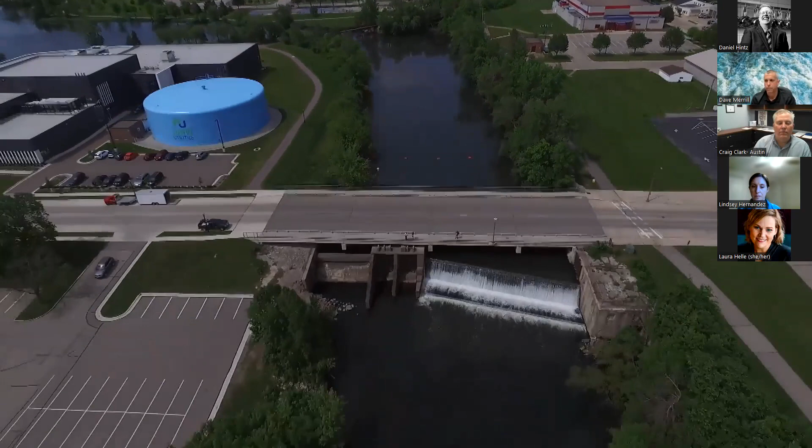So Dave, what area of town is this, just so we can have some reference? This is just east of our downtown, a couple blocks east of what our downtown area is.

And where is this footage from that you're using to create these models? The footage we're seeing is a mashup of two local water parks, one in Manchester, Iowa, and one in Charles City. They've given us permission and become allies and friends of ours on this project, helping us along the way by letting us use their images, their expertise, their experience.

So because of that, you can really show the comps of how a project like this has impacted other communities, correct?

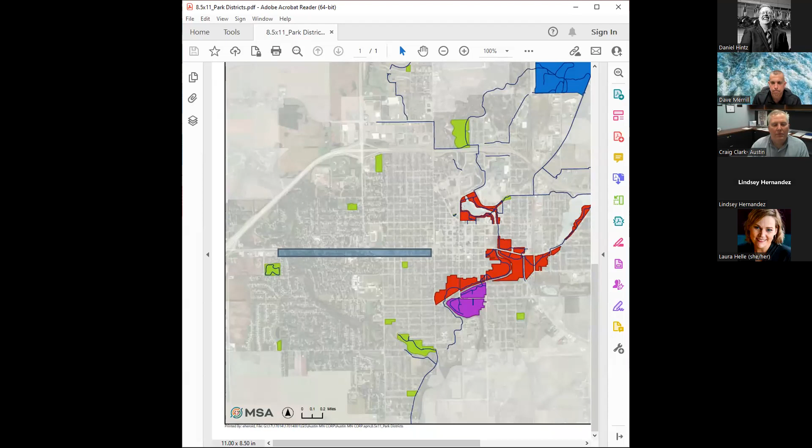Okay, so the map that we're looking at here is a product of our Parks and Trails master plan proposal. The red map that we see here is the river district that we've identified, and these are all parks that are currently connected to the river in downtown Austin. If you'll see here on the screen in the center, there's a gap, and that gap is conveniently the place where our whitewater course would be.

The idea is that we would connect facilities and amenities in our Mill Pond area, Horace Austin Park, to some of these southern central parks through greenways that we would connect through with our whitewater project. And I have another map of that.

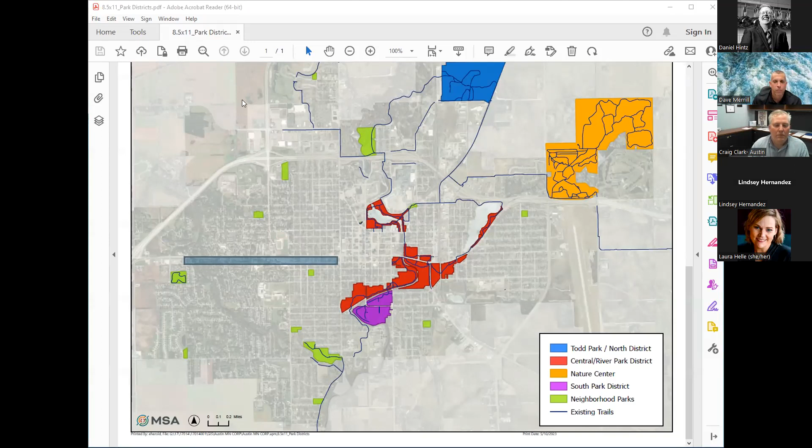So Dave, if we're having a hard time with that map, will this map be uploaded in the near future on either the city website or the parks website so we can send people to take a look?

Yes, once we have a little bit more detail. We have a meeting with our consultant REP, the company doing our feasibility study, coming up next week. That'll provide more detailed information that we'll be able to start presenting to the public. We're going to be on their pace in terms of what they really think we should be releasing at certain times.

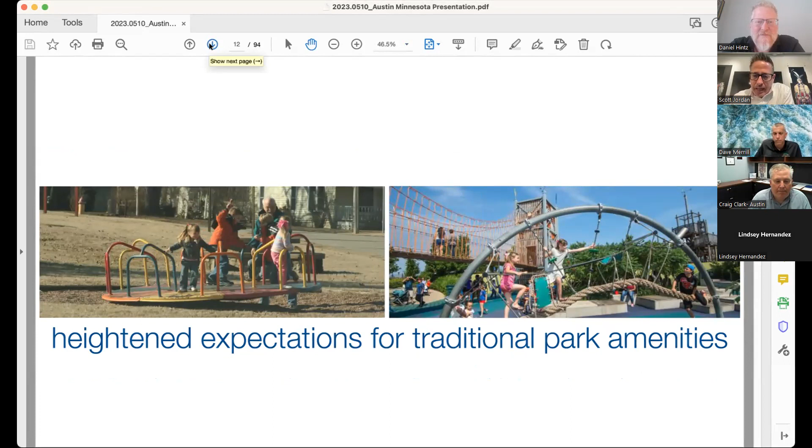The spinorama playgrounds we used to have are no longer legal, but we're creating amazing interactive play spaces that allow kids to adventure and think out their own way. We're seeing a bigger increased value on natural systems, creating places that are both for people and nature. Ultimately, parks and open spaces are about an inclusive approach to placemaking, giving everybody in the community a place where they can feel comfortable, welcome, and a place to hang out.

So I'm going to share with you 3 projects at 3 very different scales. The first one is in Wayzata, just north of you all. This is a project we've been working on since 2015.

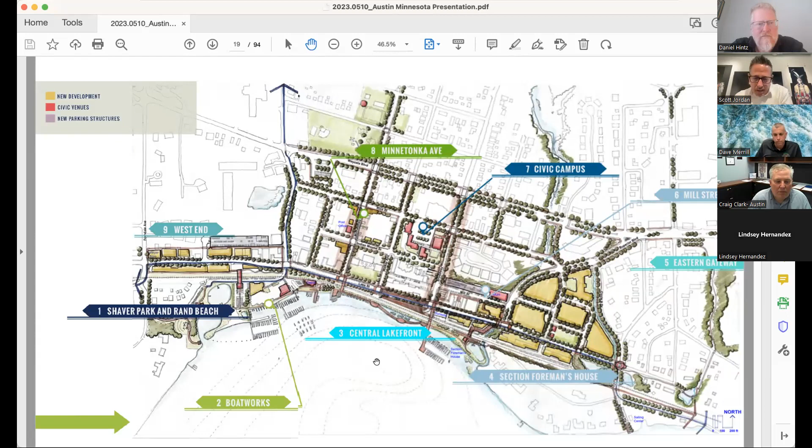This was a process that we built upon a larger community planning effort done ahead of us, called the Wayzata Lake Effect. That was a full community plan, and we were really just looking at the central waterfront area. This is where what Dave and the Parks and Trails Master Plan is doing now comes in.

We create a vision for some of those spaces to catalyze excitement and opportunity for the community. We began this process in 2015. Phase 1 was completed in 2020, and we're about to begin phase 2 construction on July 1st. We've had 5 community meetings, 9 steering committee meetings, 8 council work sessions, and 11 council presentations over that time.

So we shifted partway through and started doing what we called ice cream socials. This was for phase 2 down on the built waterfront that we completed in 2020. We still got the elder white family members coming out, but we also had teenagers and kids. We really brought a diversity of users to talk about what they wanted on their lakefront.

Ultimately, we created a series of guiding principles, or core values: making it about the lake, making it environmentally sensitive for local residents, and ultimately making it safe, since you have a railroad you have to cross to get to the lakefront.

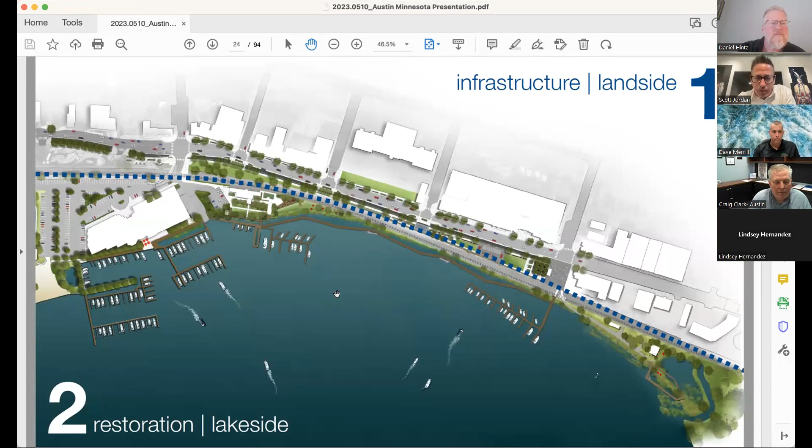So we developed a two-phase plan. Phase 1 would be everything north of the tracks in downtown. Phase 2 would be south of the tracks, the lakefront improvements. There are two different phases with potential subphases, and seven different sources of funding. Phase 1 was 9 million, phase 2 is about 10 million, and I'll go into those phases further.

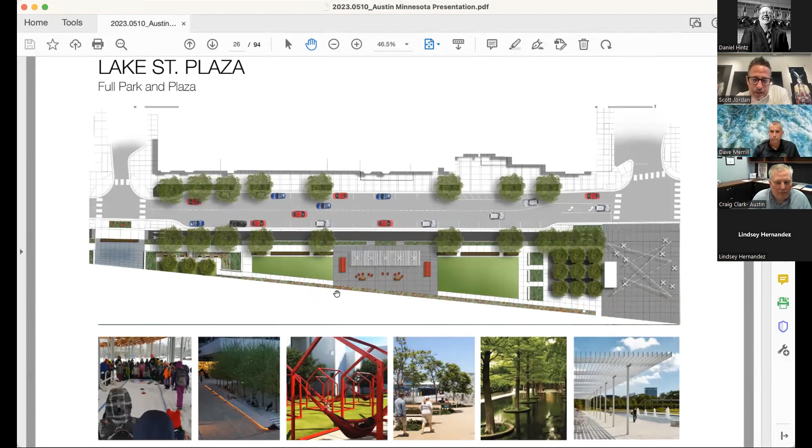The first phase looked at Lake Street and the municipal parking lot on their prime corner. If you asked community members whether, in designing a city, they'd put a parking lot on their lakefront open space, probably not. So this project was about reallocating Lake Street and creating a better pedestrian environment to spur reinvestment in retail, create a place for the community to enjoy the lakefront, and ultimately balance pedestrian versus vehicular traffic.

We asked the community, what makes great main streets? It's a balance between pedestrians and cars. It has vibrant retail that spills onto the street. There are amenities that entice users to linger. As a main street, you want people to hang out and exist there, and ultimately a main street can become a place upon itself.

This is a street we did here in Denver that has since converted through the pandemic to a closed-off street. So this is what it looks like most days now, which is quite wonderful.

As we looked at Lake Street in downtown Wayzata, this is what it existed as today: two parking lanes, two drive lanes, a center turn lane that's never used, about 10 feet of sidewalk on this side, and about 5 feet of sidewalk on the lake side to the south.

This is what we're proposing to do: putting the road on a diet, narrowing it to single drive lanes in each direction, getting rid of the center turn lane, and adding about 20 feet of outdoor space along the retail so restaurants can spill out into it. Along the south side, we're shifting it over, adding more sidewalk, and creating an interconnected regional bikeway right into downtown.

This bikeway connects out to the Dakota Rail Trail system, which runs about 26 miles around Minnetonka right into downtown Wayzata. It's really about bringing people down and realizing the economics of commerce they could attain.

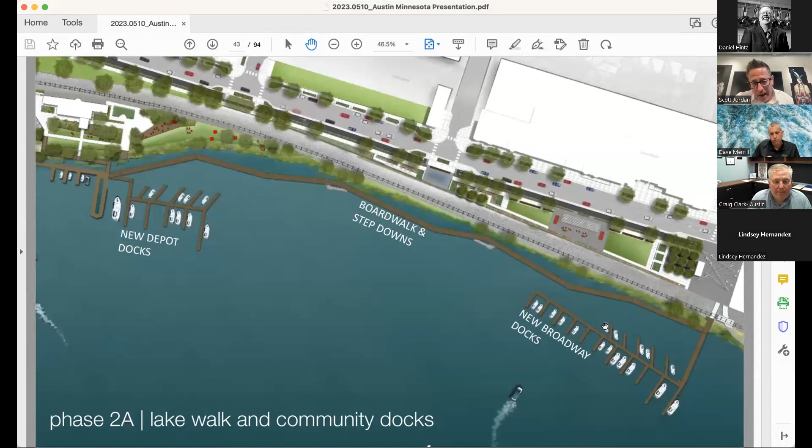So then moving into phase 2, this was where we were actually reconnecting the lake, building a boardwalk that's about 1,500 linear feet long, so people can walk along the water's edge on the waterfront, and building the docks. This is about a $10 million investment.

Again, they diversified their funding. They got $500,000 from the watershed district for some stormwater and lake bed restoration work. They received bond money from the state, and they also had some TIF money available from some redevelopment projects that they were able to shift to use on public open space.

And then they formed a conservancy that's responsible for raising about 1.5 million of those funds, and the way they're doing that is through some naming rights. An interesting story about that is the property owner who owns the building on the north side of Lake Street

fought against the project during early design and has since realized the benefit it's created for downtown. They're actually the leading donor, donating about $500,000 towards the Conservancy funding to build the boardwalk because they just see the value of what it is. So we took a concerned neighbor and turned them into a project supporter.

So the lake walk itself is an extensive 10-foot wide boardwalk with some step-downs where you can get down, touch the water, and then some community docks.

This is beginning July 1st, when they start driving piles, and we will be open by the end of the year. So for the first time in 80 years, they'll actually be able to walk along the water's edge in downtown Wayzata.

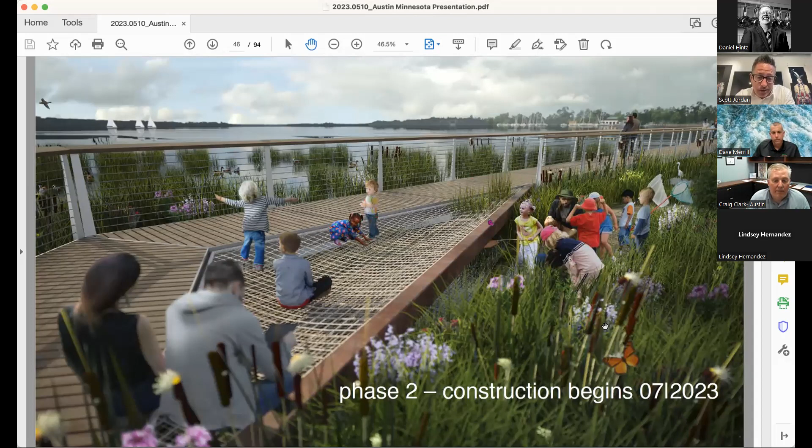The next project I'm going to talk about is a little bigger scale. This is in Denver, Colorado, on the South Platte River. If you don't know Denver, the South Platte, at the confluence of the South Platte and Cherry Creek, is where Denver was formed, right here.

But even in the 50s and 60s, it became an industrial area. Like every city in North America, we kind of turned our backs to the river. This is what it looked like in the early 2000s, where it was literally a wasted industrial area with a very constrained river flowing through the site.

This is what the site looked like previously, and what it looks like today. What I'm really going to talk about is how a park can become part of a bigger open space system to really catalyze reinvestment, to create new communities, and to create a shared, attainable, and market rate community where previously nothing existed.

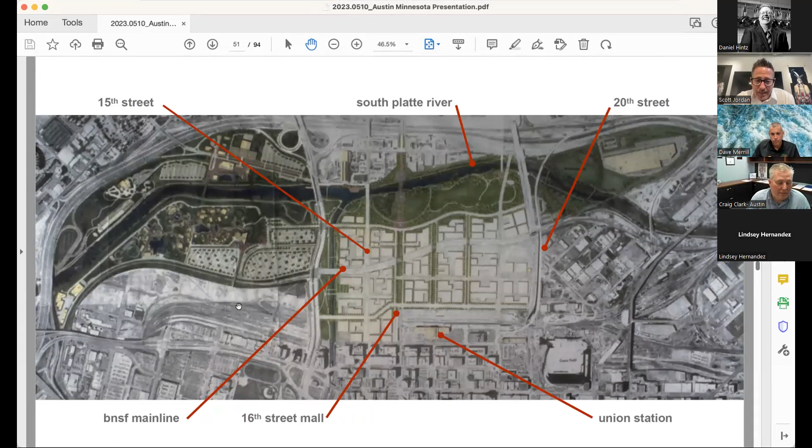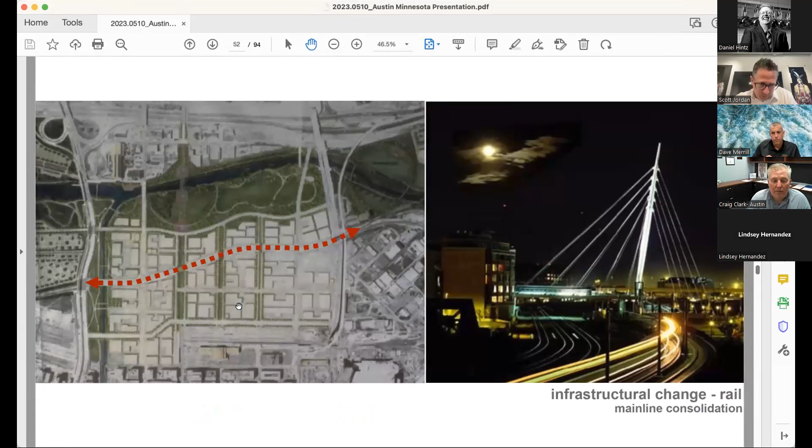Some of the key moves, and how this folds into a larger comprehensive plan, were that we looked at consolidating the rail line that cut through downtown Denver to narrow it down and make it easier to connect. A couple of major improvements were new roadways: Little Raven Street, the street that edges the park, and then 20th Street and 15th Street, which were actually viaducts.

They were raised about 20 feet above street level going over the Platte River. We knocked those down and connected them at grade, so the entire system was all connected.

To give you an idea of how bad the Platte River was, when they knocked those viaducts down, they just knocked them into the river and then removed the construction rubble out of the river.

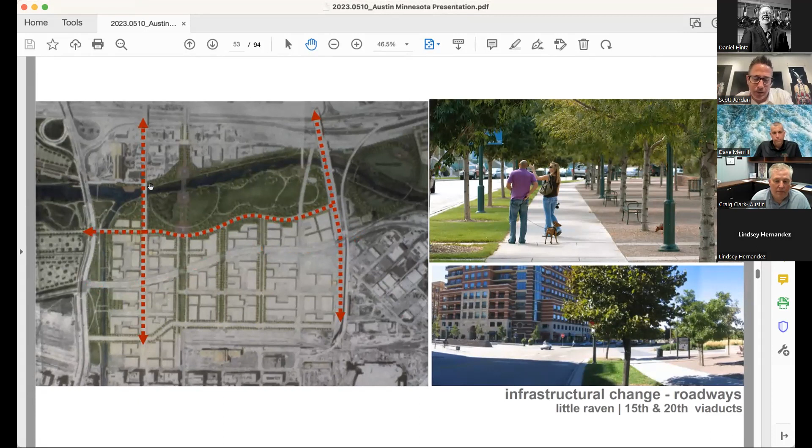In today's environment, you'd never be able to do that, but it just kind of shows you how bad and degraded the river system was.

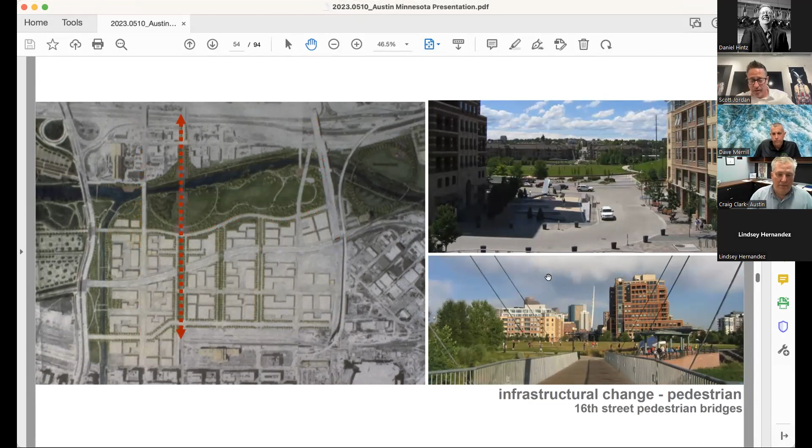A second or third major infrastructure component was a series of bridges: one across Interstate 25 to connect to the adjacent neighborhood, LoHi, a bridge across the Platte River, and then a bridge across the consolidated main line. So you're basically connecting downtown to the western half of Denver through a series of open space connections. Then we looked at how we could take a negative asset, the South Platte River, create a 100-foot native buffer around it, and restore its natural flows.

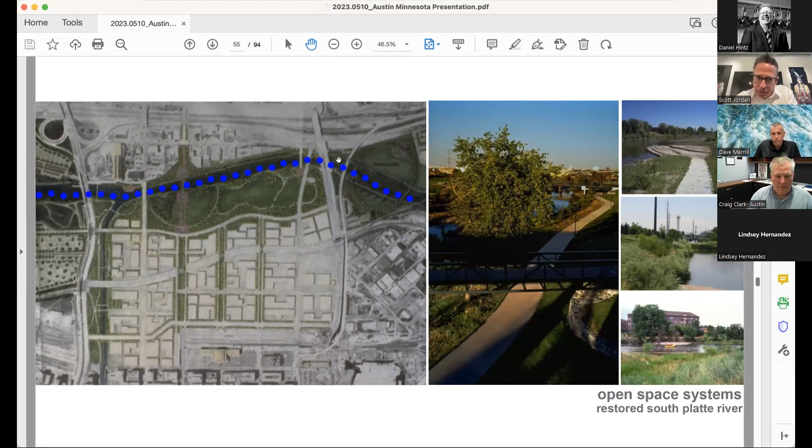Just downstream from here, in this park, we introduced a kayaking course as part of this bigger restoration system. We also looked at the park and asked, can the park actually become a relief valve during floods and high water?

What you're seeing here is an area we call the seeps, that during big rain events pulls water into the park, holds it, allows the first flush of water to get through the river system, and then drains the water back into the river. It's really improving water quality downstream while creating an interesting, highly dynamic ecological area.

You can see how it looks during high water, versus what it looks like as a nature area at the center of the park when it's dry. This area has become one of the most popular areas of the park because of all the cottonwood trees that have taken over. You get nature right in the heart of downtown, mitigating flooding issues while also creating usable public space. The open space system creates the catalyst for some of the reinvestment you're seeing.

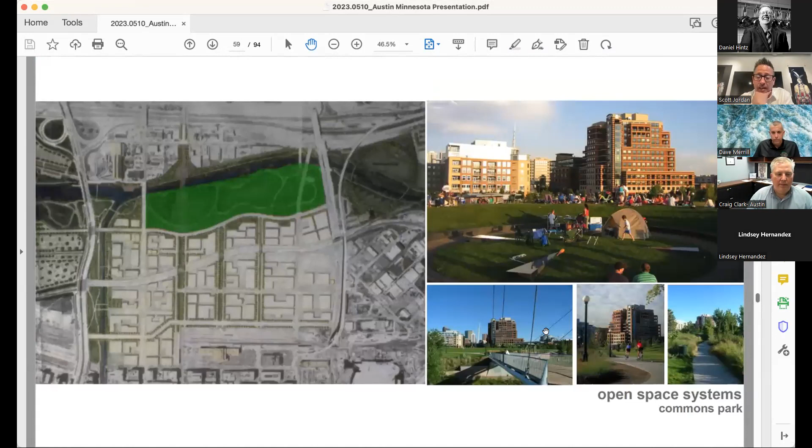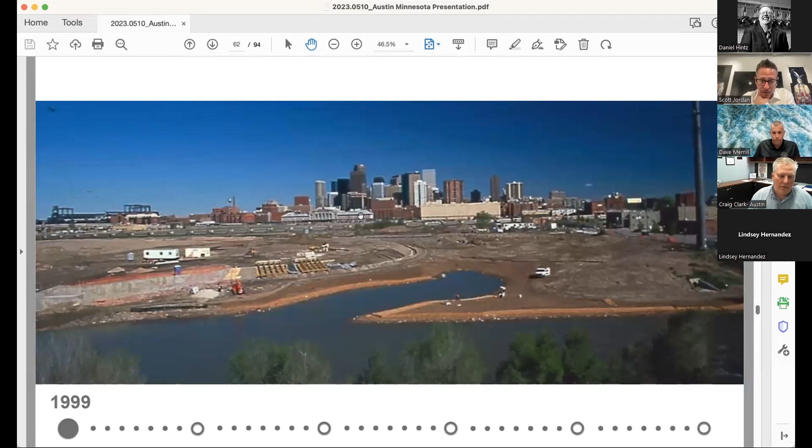This is what it looked like in 1999 when we began. You can see, this is Union Station, our train station. There was nothing between it and the river.

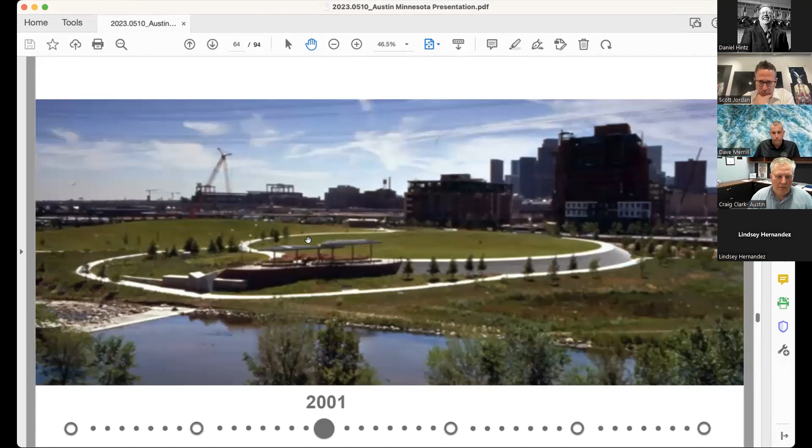As the project was getting underway, you can see some of the towers going in for the elevator systems, the first two buildings that got developed, continuing to develop and evolve. The reason I stopped at 2015 is that this development is fascinating because it spurred reinvestment along the river's edge.

But there was still this gap between downtown and the waterfront. What's fascinating is that most development patterns don't leave the edge of a city, go somewhere else, and work their way back. Because of this open space system, it became the catalyst for this reinvestment.

Since then, this area has all been infilled with office and residential, and we've connected back to the city more holistically.

In terms of metrics, the biggest thing I want to emphasize is that we took an area completely devoid of users and residents and created 6,600 new residents, of which 20% were attainable housing.

Attainable either rental or for-sale condo units. We've been able to create this diverse mix of income levels on a waterfront: 20 new retail shops, about 250,000 square feet of office, 60 acres of new parks, and 3 miles of restored South Platte River.

This really completely changed Denver in the time that I've lived here, and gave us a whole new place and a whole new system to work within.

The last project I wanted to talk about is a little bit unique. This is in downtown Springdale, where Daniel and I got to know each other.

It's a building called the Jones Center, a former trucking facility converted into basically a recreational and learning center full of nonprofits, intended for low income, mostly Marshallese and Latinx community members who live in the region. It was dedicated by Harvey and Bernice Jones, who founded the trucking company, became wealthy, sold the company, and converted this into a community center.

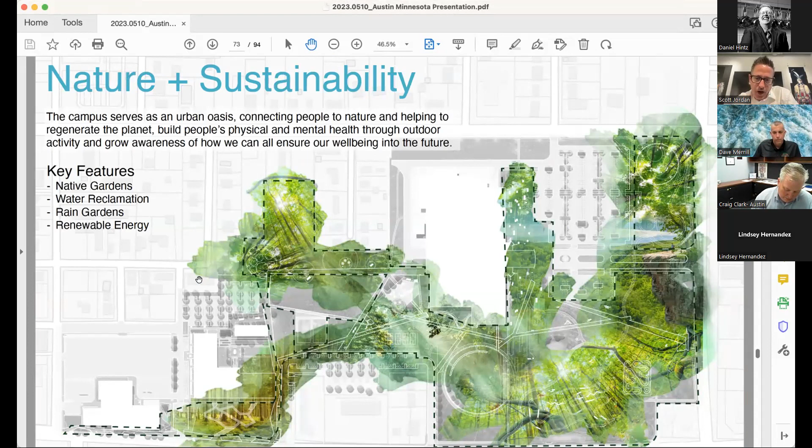The core values of this project really are about nature and sustainability. We're taking over 50% of the campus and converting it back to native, non-irrigated plant materials that will be a learning center for the community, while also positively impacting their carbon footprint and the resources they're using.

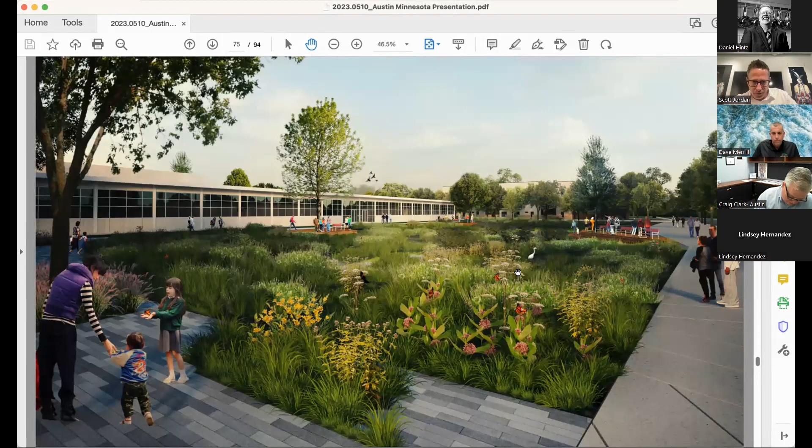A great example of that is this area just in front of the JTL shops. This is full of 27 nonprofit agencies doing really amazing work with the lower income communities in the region. They front on a big piece of lawn, and we're looking at converting that into a working rain garden that'll capture all of the stormwater that falls on site, treat it, and make this a lush educational environment. So as you arrive at the campus, you're really experiencing nature from point one, from your first entry point, and it becomes part of the ethos of the campus.

We're also looking at ways to create exploration, innovation, and creativity, through play, recreation, art, and integration of learning opportunities. How can all of these spaces be multi-benefit and provide a variety of different experiences?

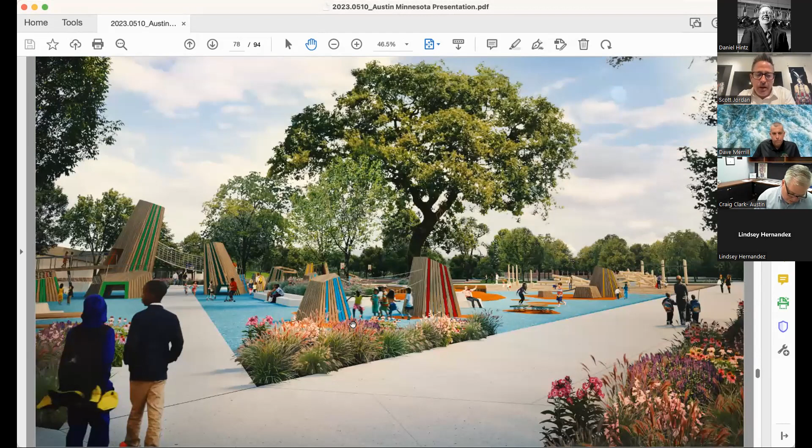This is the existing playground on campus today. When it was put in about 20 years ago, it was quite revolutionary in that it was an ADA compliant playground. We're now looking at replacing that with a universally designed playground that works not only for people in wheelchairs, but also deals with mobility issues, sensory issues, autism, and a different spectrum of capabilities, by creating a variety of spaces that enable everybody to find a place to play, engage, and enjoy. Even up to teenage girls, a group we discovered doesn't feel represented, so we're creating some somewhat protected hammock areas so they feel safe but still part of it, for when they don't really want to play on the playground.

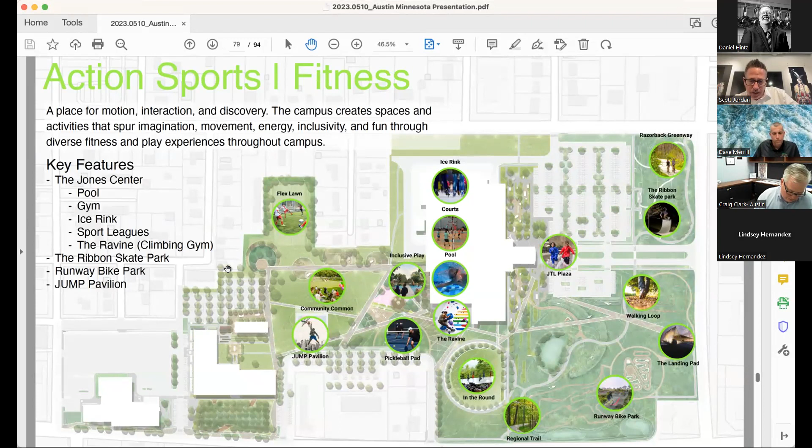And then ultimately getting it back to the bigger goal of the Jones Center as a recreational facility, creating a place for action sports and fitness. And how can we bring that ethos of recreating and being healthy from inside out onto the campus?

They've got a really amazing bike course, but right now it's all turf. We're looking at, can we restore that landscape and create an environment where you're biking and skating and doing action sports through native landscapes.

What most open spaces tend to do is create this opportunity for social gathering and entertainment and cultural gatherings. And what we've learned working in a lot of these communities, especially with the Latinx and Marshallese and most non-North American originating community members, they use parks way better than we do. They like to go gather, hang out for the day, and spend time in it.

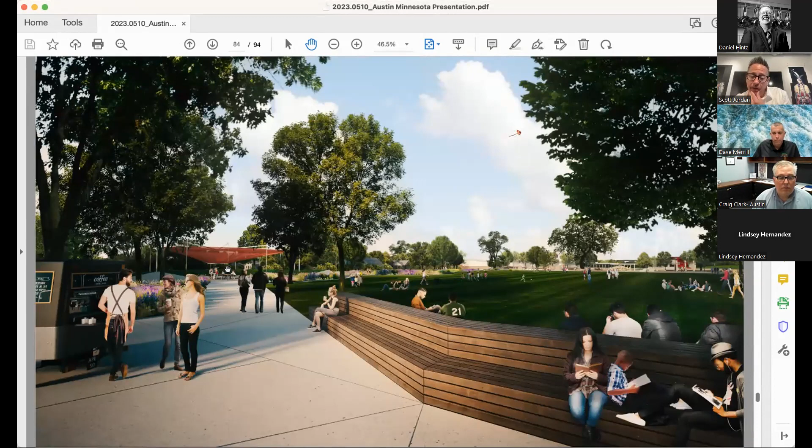So how could we create this campus as a place where you can come gather and hang out, and take what currently is a major parking lot - this is where they used to park the trucks, that's why it's a big asphalt area in the heart of the campus - and convert this into the big community lawn where they can gather and recreate and come together as a community and realize those commonalities.

So ultimately, we're creating this really diverse set of offerings across this 52-acre campus that we think is going to create a unique open space experience at the east end of downtown that's really going to become an anchor for the entire region. And I think these are the types of opportunities that you can begin to explore as you think about your riverfront system.

I know you've got flooding issues, you've got other concerns about native habitats, but you can combine those and create really special places.

Think about the food issue and giving people access to food. That park in Denver at Commons Park - one of the things we just recently added, because of all of the dense residential communities around there without having yards, we've actually created a series of community gardens in that space so people can produce their own food and have their own garden environments.

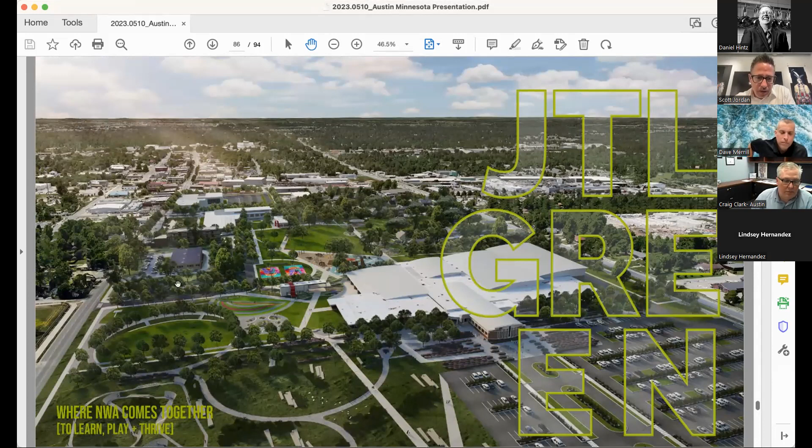So this is the vision of what we've created. We've taken lawn and parking and created a real green anchor to downtown Springdale.

This will be funded - the funding mechanism for this is unique. Northwest Arkansas has some major corporations that look to fund community related open space.

So the Walton Family Foundation funded the actual design of this work. And then the Jones Center is going through a $40 million capital campaign and searching out grants for all of the naturalized systems that we're using to create these improvements, add art to the campus, and build a new Jones Center - or JTL Green will be kind of an anchor in Northwest Arkansas moving forward.

So, to take this back to what does this all mean for you all as a community in Austin - why do you invest in parks? I think the biggest thing that we're seeing most places investing in parks is because it helps attract and retain residents and businesses, because that's what's expected in the place you want to live.

But there's also a lot of other non-quantifiable benefits that add joy, health, and public safety. It increases tourism, it will have an impact on real estate. And if you do it effectively, like we did in the Central Platte Valley, we can maintain attainable housing in those regions. If you do it and plan for it, it adds to your environment, benefits your environment.

And as Dave was saying earlier, it increases local spending because you're spending more time in your downtowns, buying from your retailers, buying from your brew pubs, and spending time on the waterfront and downtown Austin.